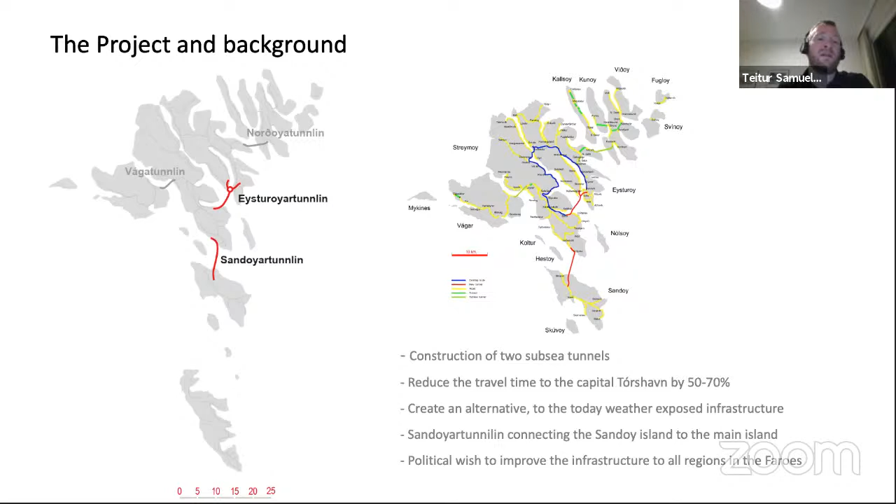It was a political wish, and there is a political wish in the Faroe Islands to improve the infrastructure and connect all regions together, either by ferry or by subsea tunnels, as we have done over the last 20 years. Next slide, please.

The idea behind these tunnel projects is to create one large growth area around the main area, Tórshavn, Eysturoy, connecting those areas to the islands further away. And as I said, the Eysturoy tunnel will improve the infrastructure for around 70% of the inhabitants. And it will establish Runavík, which is the third largest city in the Faroe Islands, and Strendur as suburbs to the capital Tórshavn.

And the financing behind having these two subsea tunnels in one company is that the Eysturoy tunnel is expected to be commercial because there will be so much traffic in it, and use that tunnel to also finance the Sandoy tunnel, which is sub-commercial on a standalone basis because only 1,200 people live on the island Sandoy. Next slide, please.

As I said, it's a limited company that owns the tunnels. It's owned by the Faroese government. It was established in 2014, and the main goal of the company is to construct and operate these two subsea tunnels. First, we drilled the Eysturoy tunnel, and when we had a breakthrough of drilling the tunnel, then we started drilling the Sandoy tunnel.

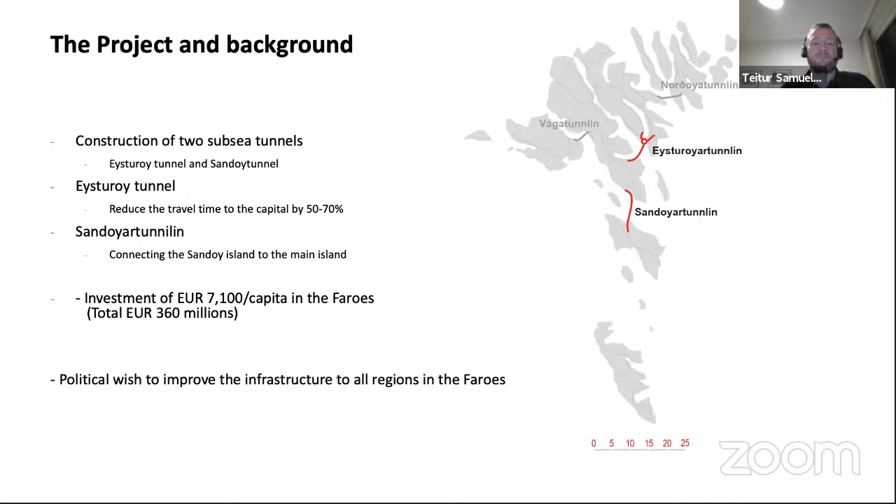Yeah, the investment per capita in the Faroe Islands is around 7,000 euro. So it's a significant project. Next slide, please.

Yeah, this is the tunnel line for the Eysturoy tunnel. It starts outside the capital Tórshavn on Hvítanes, then it goes under the sea, and then it comes into Eysturoy, and there is a roundabout, so it's connecting two sides on this fjord. It's a fjord which is around 10 kilometers long. So it was a political will that both sides should be connected, and therefore this roundabout is in the tunnel. Next slide, please.

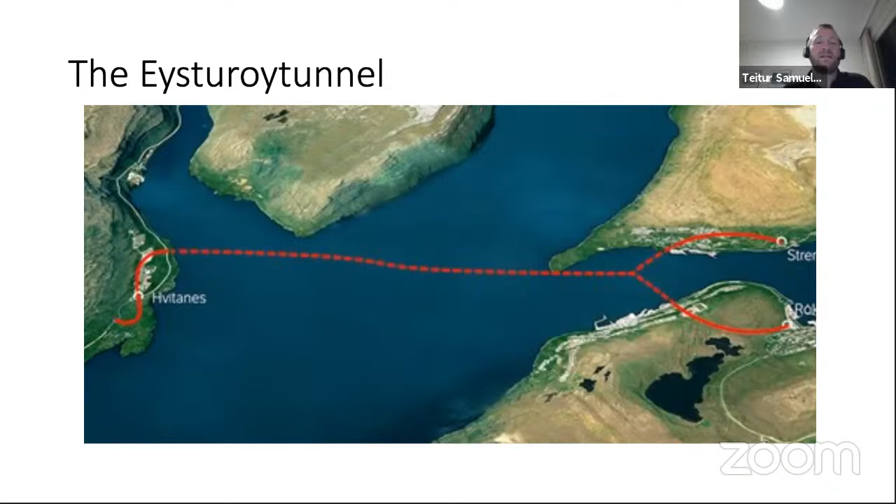Yeah, this is an animated picture of the roundabout before it was carried out. I will show you later how it looks like today. Next slide, please.

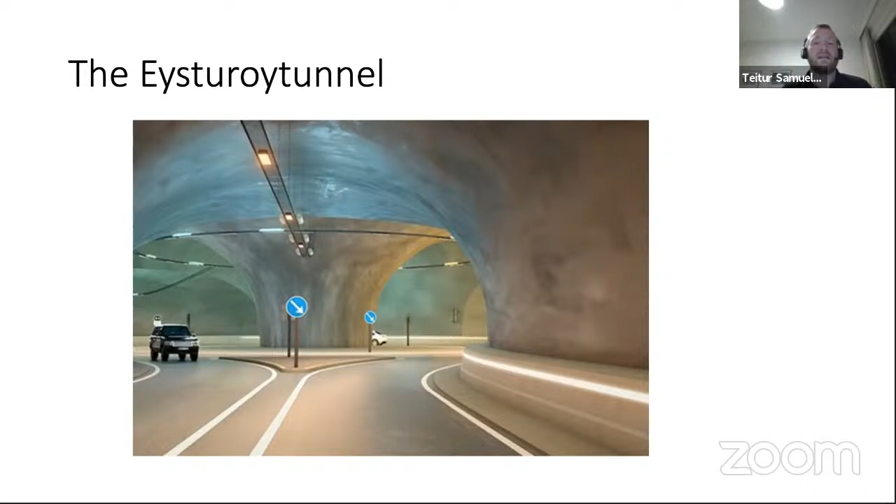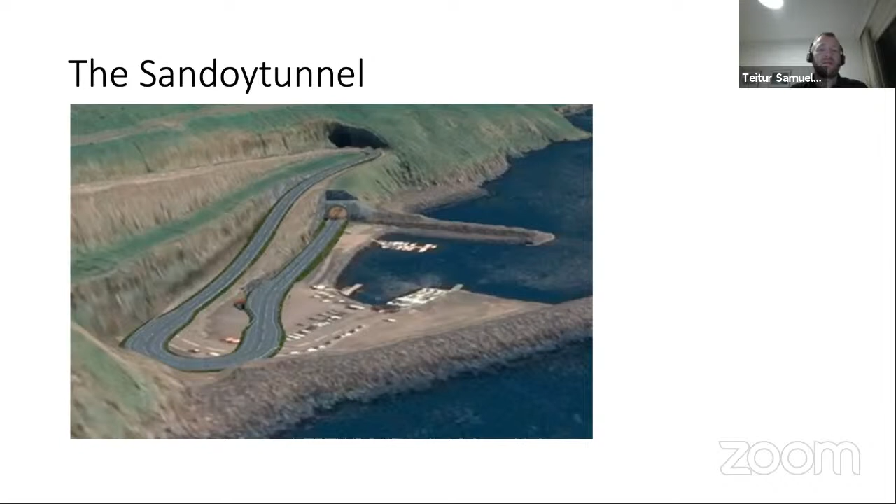Next slide, please. Yeah, this is the entrance on Streymoy outside the capital Tórshavn, where the tunnel starts, where the ferry sails from today. Next slide, please. Yeah, and this is the entrance on Sandoy, how it is planned to look like when the tunnel will be finished in 2023. Next slide, please.

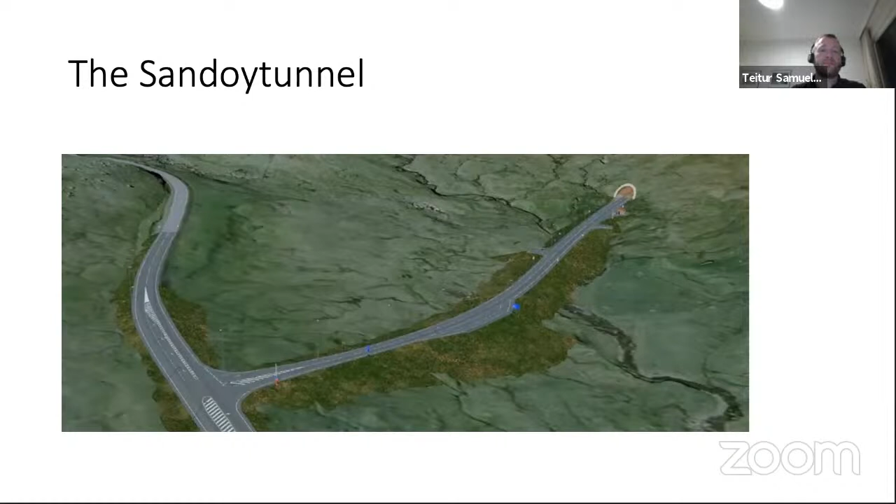Yeah, we have organized the project. This is how it's organized. We are very few employees in the company. There is a board of directors, then it's me, the CEO, and then we have hired in a project manager, a site manager, and one responsible for health, safety, and environment. Then we have consultants, so it's a kind of a network organization.

We have designers who have designed the roads, and then we have consultants designing the tunnel. We have geologists, engineers. Those are from the Faroese Geology Institute. Then we have hired in control engineers. And then the lenders who are financing the project, they have a technical advisor who is visiting the project around 2-3 times a year, a bit less now during COVID, but otherwise.

And then we have other advisors, Sintef in Norway. It's a professor, Eivind Grøv, who's a professor in tunnel construction. Then other advisors, lawyers, insurance, and so on. Then we have a response group who will take care of the safety requirements. And then we have a dispute panel. That's very important. We have a dispute panel between us and the construction company, NCC.

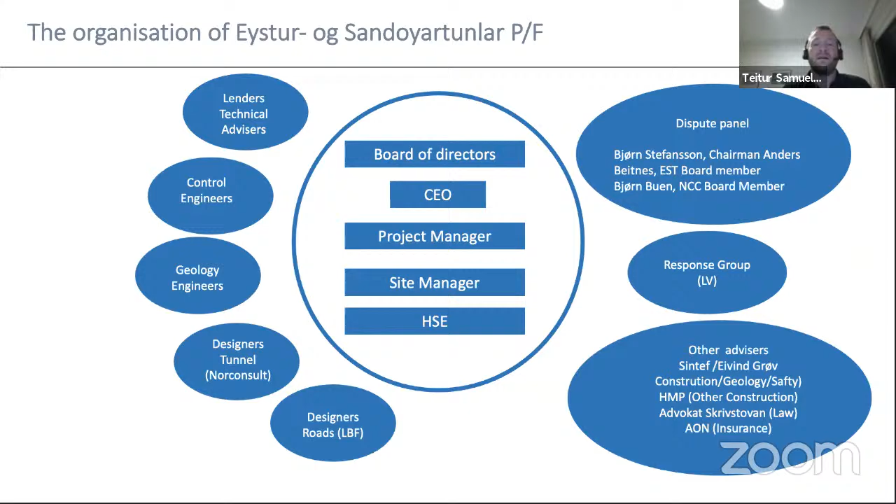Yeah, due to the size of the project, we have been very much focusing on risk right from the beginning of the project to try to identify where the biggest risks are in the project, and then how we can mitigate and reduce these risks. So it's a big project also internationally in a small remote community. And as we saw it, the main risk was how to finance the project, because we have very good track records on how to do tunnels in the Faroe Islands.

In the project, there's a very high financial gearing. We have a very high debt. So we thought that the biggest risk within the project was the interest rate, because we have a very long construction time, 7 years from when we start with the Eysturoy tunnel until the Sandoy tunnel is finished.

And if we have a construction financing, which is quite normal to have during the construction period, and then another financing taking over when the project is finished, we would not know what the interest rate would be 7 years after we started. So we have a financing where the interest rate is fixed from day one, which means from late 2016 until 2040. So we know exactly how much interest we will pay every year.

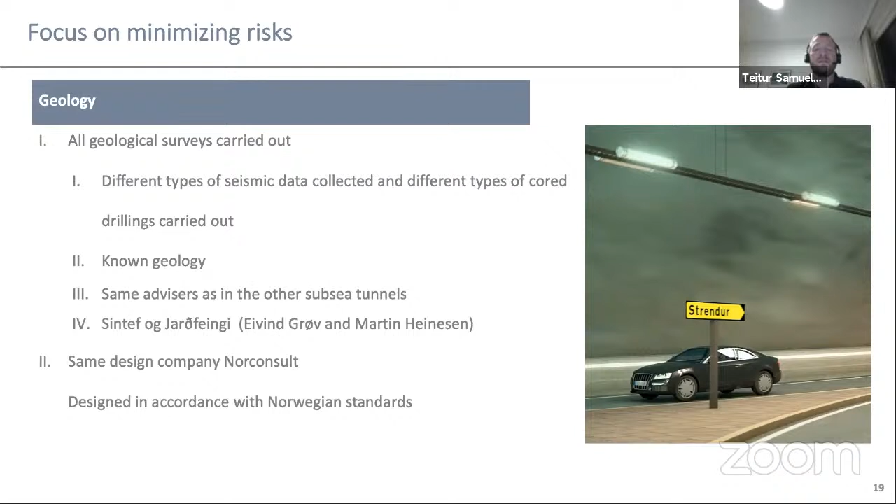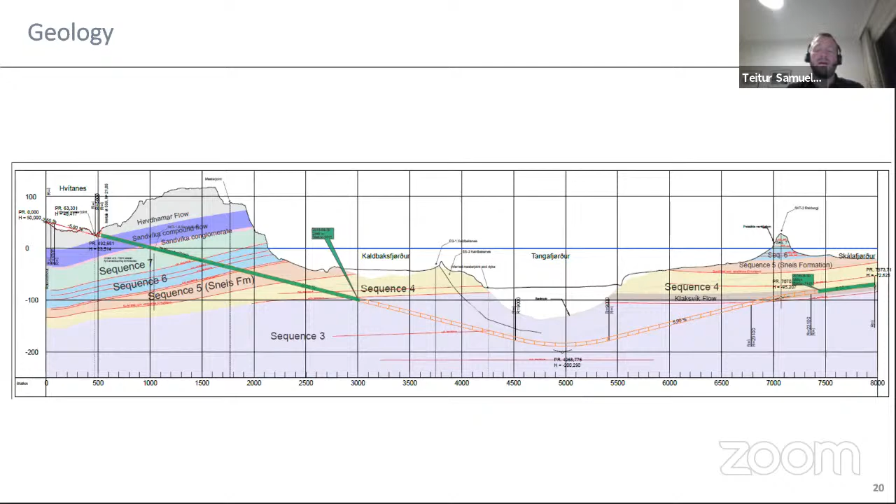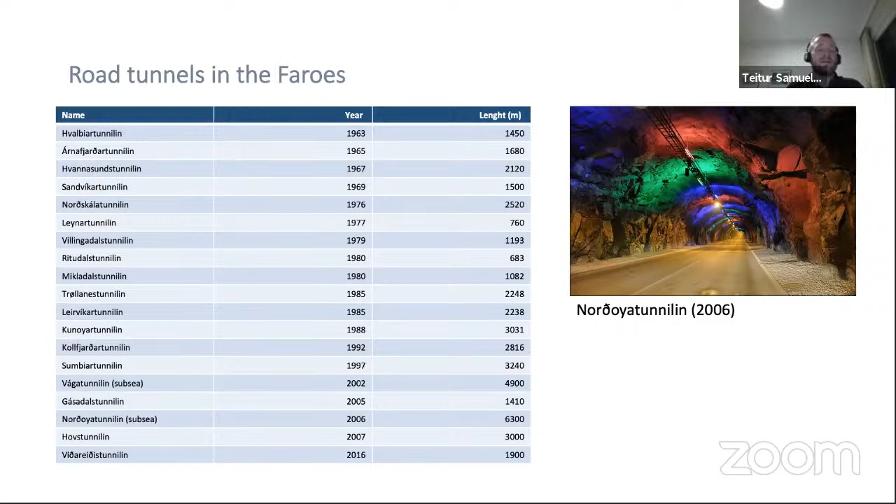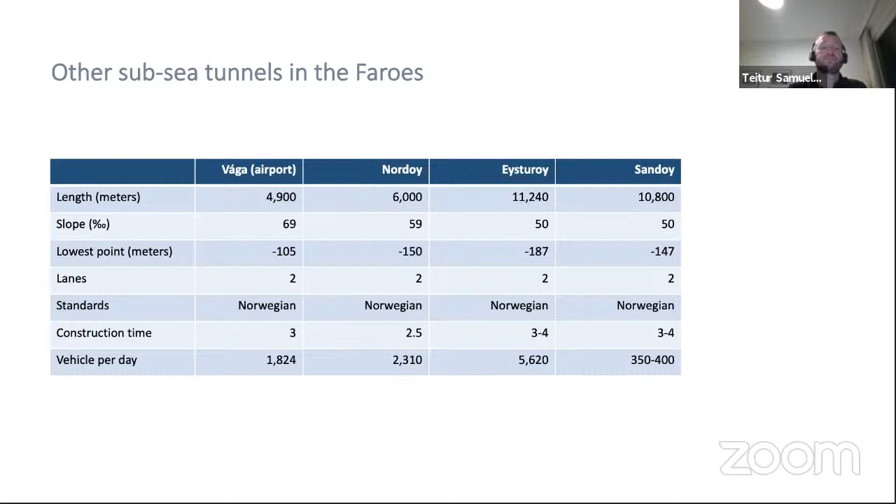And the construction time for the Eysturoy tunnel and Sandoy tunnel is around 3 to 4 years, while the others are around 2.5 to 3 years because they are shorter. And the expected vehicles in the Eysturoy tunnel is around 6,000 cars, while the Sandoy tunnel is only around 350 to 400 cars. As I said, the Eysturoy tunnel will partly finance the Sandoy tunnel, as there's more traffic in the Eysturoy tunnel. Next slide, please.

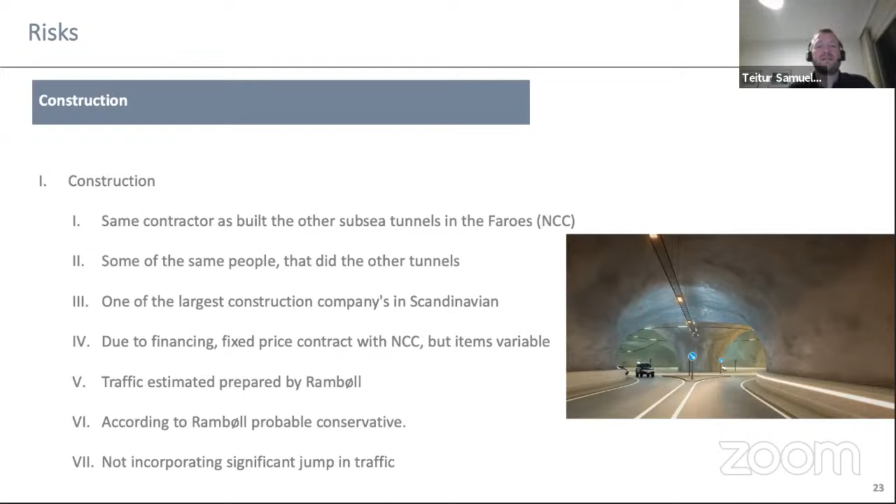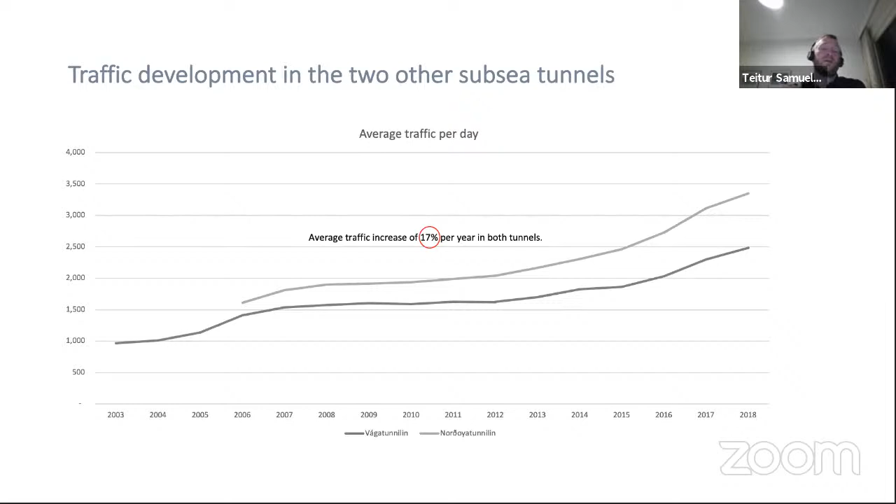So the Eysturoy tunnel opened for traffic on the 19th of December 2020. The traffic is somewhat lower than expected in the first months, but it's steadily increasing, and it might take some time until the traffic has picked up to the level that we expected. Today, it's around 5,000 cars using the tunnel every day, and it was expected that it would be a bit more than 6,000 cars, but it's increasing all the time. So hopefully it will not be too long until the traffic is as we expected.

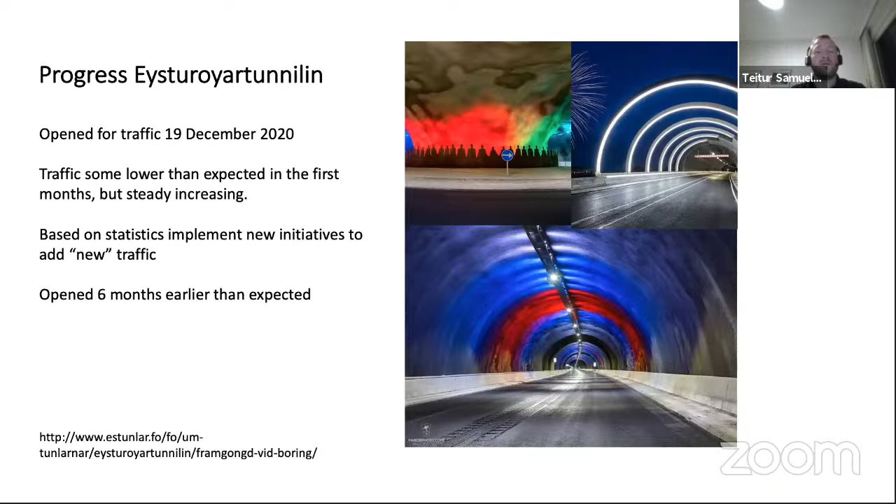The construction went very well. Actually, the tunnel opened 6 months earlier than we expected in the long-term financial budget for the project. So the construction was very successful. Also, if we remember that we entered into COVID in early 2020, we had almost a year left of construction, but it was possible to carry it out without any complications. Next slide, please.

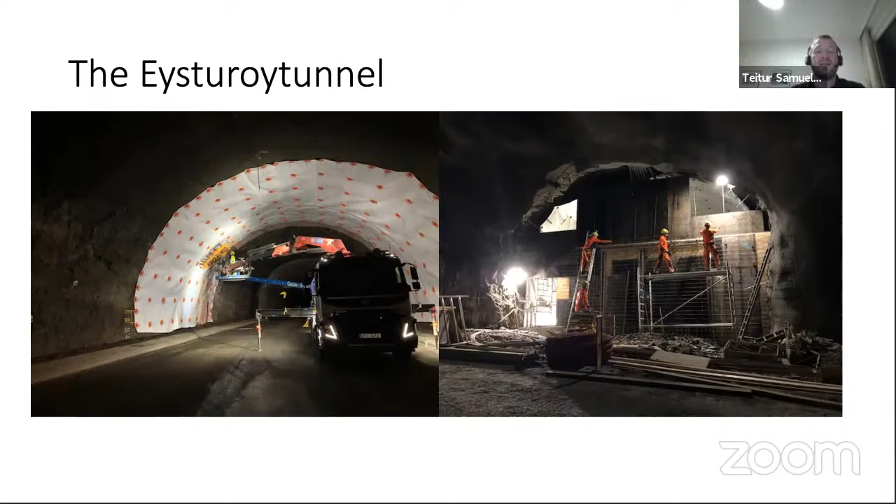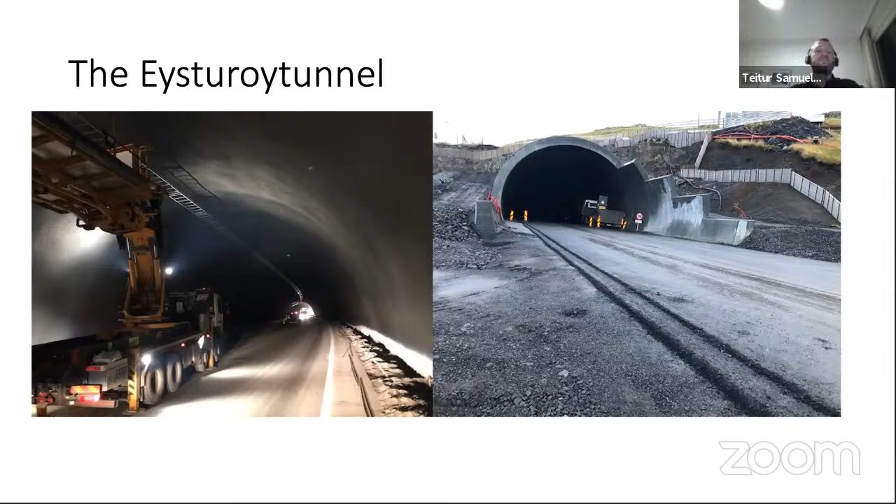These are just some pictures showing how it looks in the tunnel before it was finished. This to the left is waterproofing, so that no water is coming down on the driving lane. And the other one is the building of the water reservoirs inside the tunnel, where water is running into before it's pumped out. Next slide, please. To the right is the portal on Strendur, on Eysturoy, before it was finished. And to the left, the electricians are installing the lights in the tunnel. Next slide, please.

The status of the Sandoy tunnel. We have drilled 4 and 5 kilometers from each side of the tunnel. In total, we had drilled 9,319 meters this morning. That's about 87% of the total drilling length. The picture to the right is not totally updated, so it's actually shorter between the blue lines than it shows. We had some technical issues when updating it. We expect a breakthrough around New Year. We don't know if it will be before Christmas or just shortly after Christmas. And the Sandoy tunnel is expected to open for traffic late 2023.

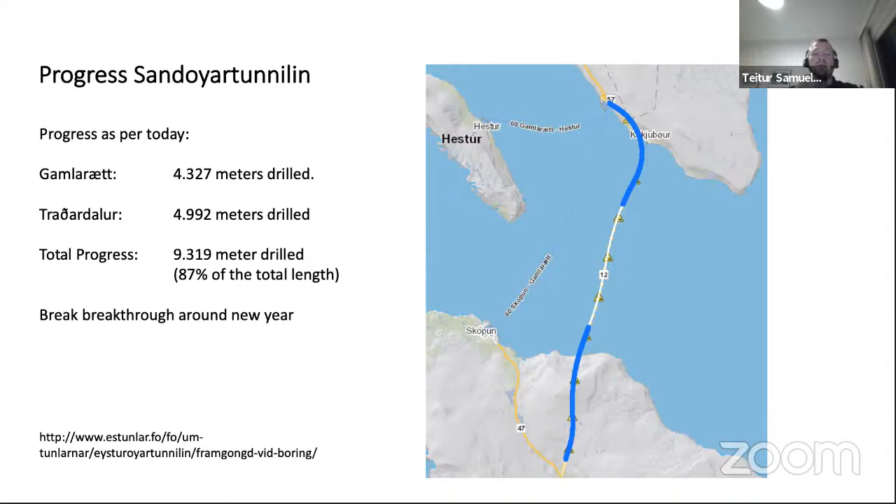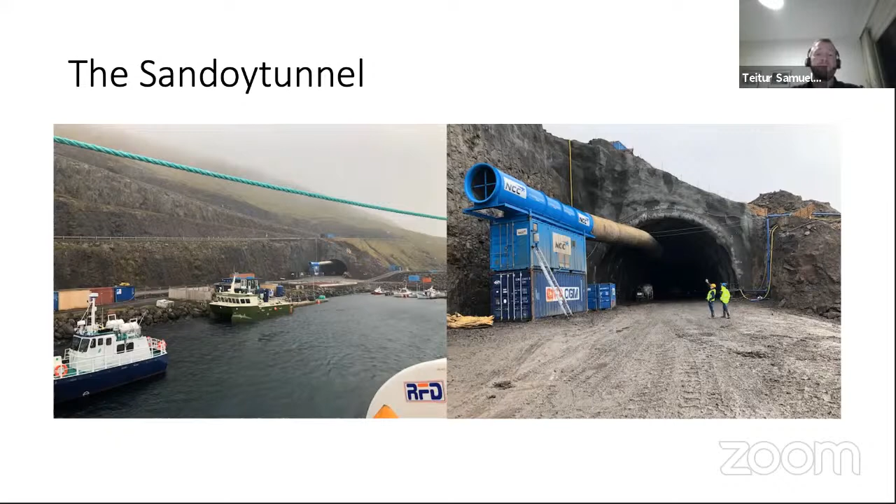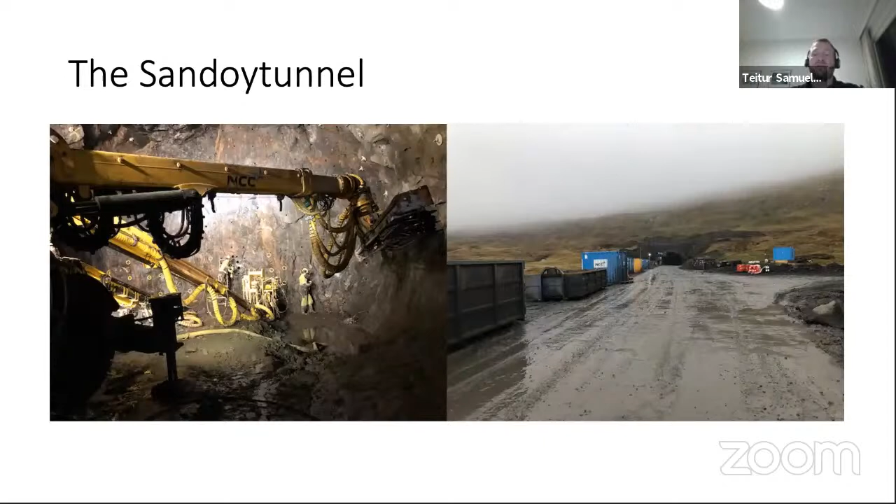Next slide, please. This is just how the construction site on the Sandoy tunnel looks today. Next slide, please. This is just how the drilling is carried out, at the entrance on the Sandoy side. Next, please. These are just the dates when the tunnels will be finished. The Eysturoy tunnel is finished, and the Sandoy tunnel, as I said, late 2023. Thank you very much. I think this was my presentation.

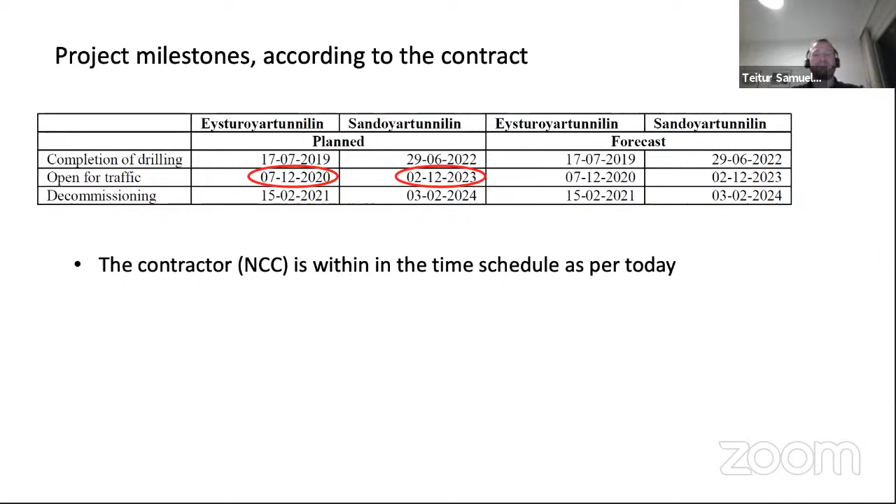Well, it's absolutely fascinating. I've been sitting here with pen and paper doing some sums while you've been speaking. Can I ask you, first of all, about the interest rate? Was there a feeling in the Faroes that the record low global interest rates were really an opportunity to be taken advantage of? I'm not sure. No, I don't think people were very much aware of that. I think we were lucky in the timing.

Do you think, in other words, the will was there really to go ahead and make it happen? Yes, definitely, because this is a project that has been on the way for many years. I think the first ideas started in 2003. And for a long time, it was a discussion whether it should be made, especially the Eysturoy tunnel, carried out on a private basis, or the government should do the tunnel.

Because the Eysturoy tunnel is financially possible to do as a private company, because it's generating so much revenue. So it is possible to do it on a private basis, but the Sandoy tunnel is sub-commercial. But then all the parties in the parliament agreed that by putting them both together in one company, they could use the Eysturoy tunnel to partly finance the Sandoy tunnel.